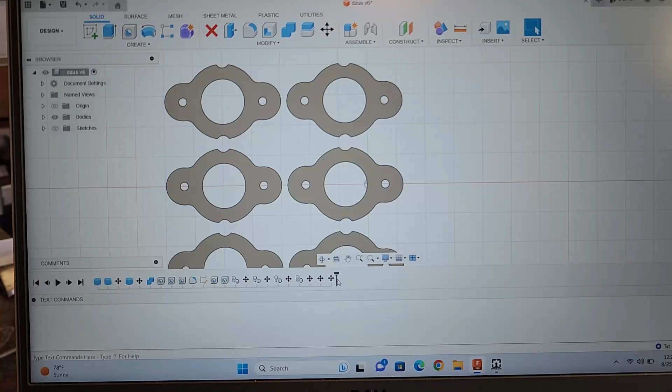Okay, quick overview on how I made this. So there's the end product. I'm going to go all the way to the beginning. Okay, so made a circle, made another circle, or I should say cylinder. Those are cylinders.

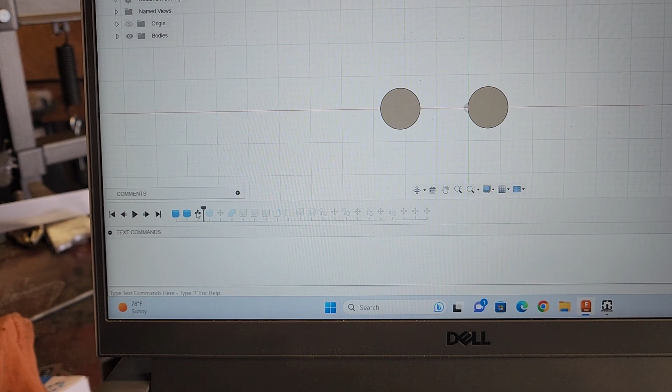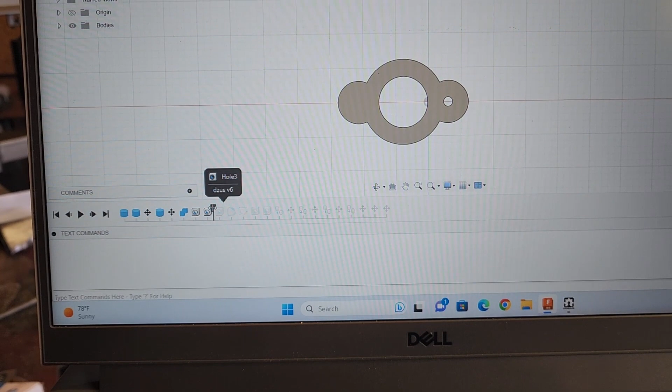Spaced them the appropriate space, made another one in the inside, positioned it correctly, combined them. Center hole 3/4 inch, outside hole it's a 140, gives me a little room for a 1/8 inch rivet. Same thing, that's just centered in this circle there,

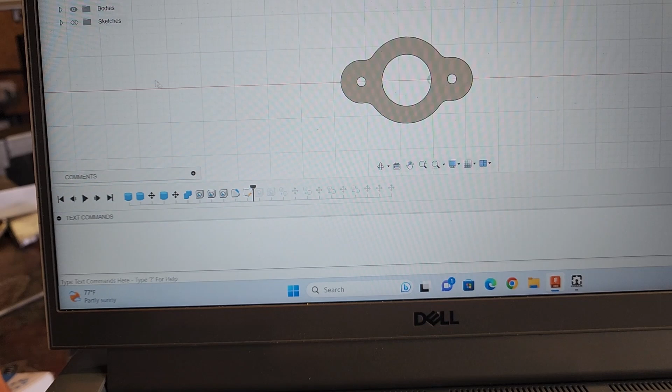radiused the edges there. Now this is where I created a sketch to locate the spots where I clearanced it out. Okay, turn the sketch off. Now next is creating that hole, which is on this plane, but you locate it off of the sketch. So you can see there's the sketch on and off.

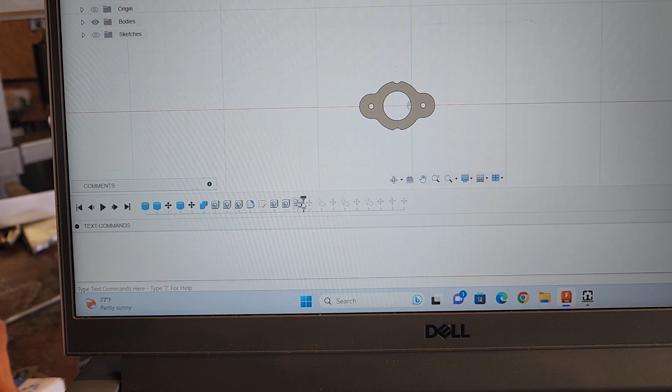Okay, what was this? It says copy and paste bodies. Oh, because I copied and then moved it, and then I did the same. This is how I duplicated it to get my 6 pieces, so it would cut 6 pieces. And then I spaced them out a little bit to get them away from each other so they would cut

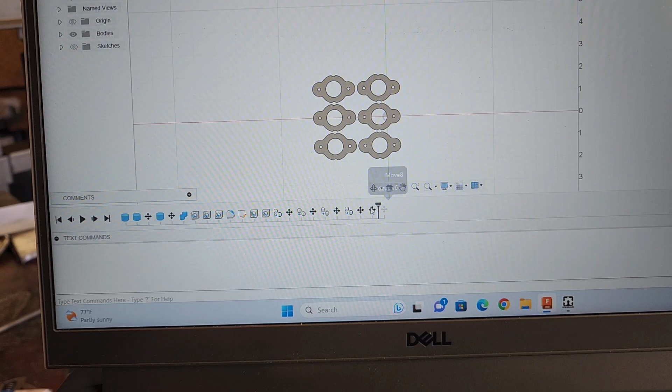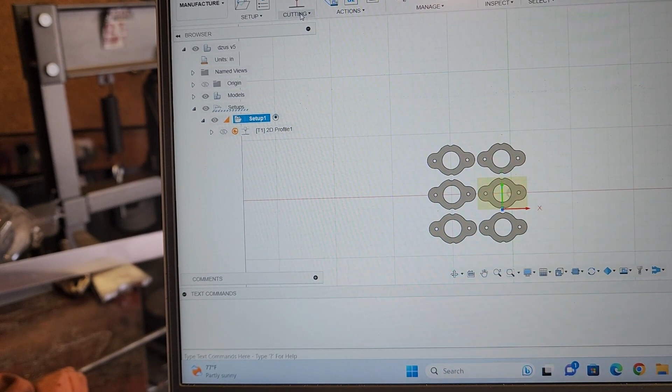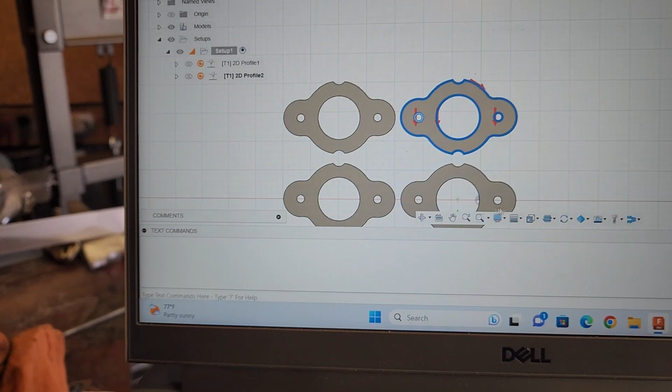a little better. So then you go over here to click that, go down to manufacture, and then how I do this with everything actually set up is you hit the cutting 2D profile, and you kind of go over here and select your plasma cutter, and then you just go through and select all of the contours that you want cut, each and every one of them. So you go through and you do all that stuff.

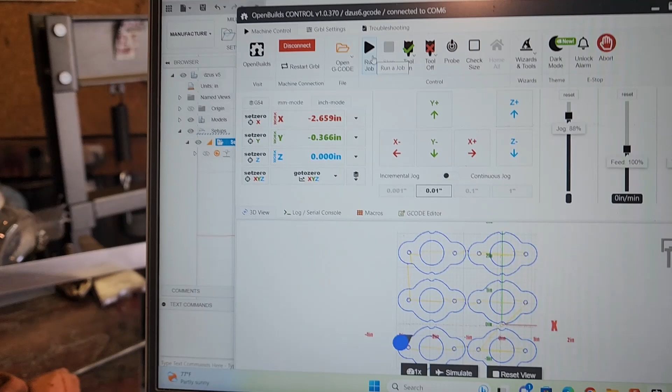You go up here, post-process, it creates an NC file. From there, you open the NC file up. So you open the G code and it pulls it right up there. And then once your machine's homed, which I'll show here in the next little tidbit, you hit run job, and that's it.

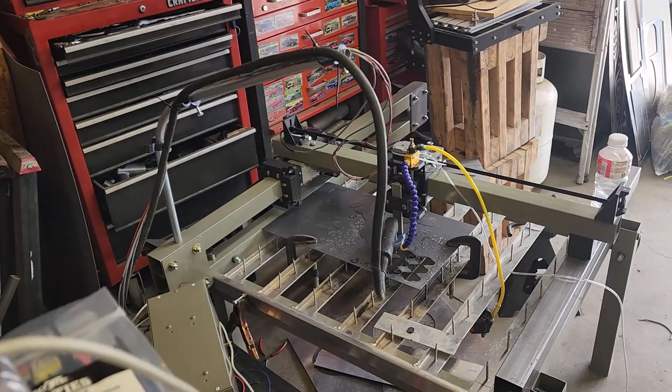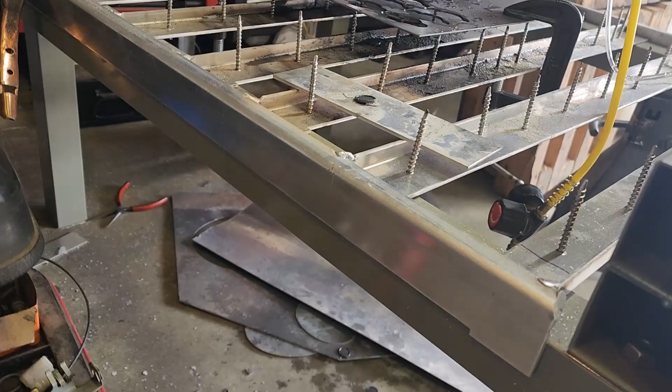Pretty easy how you can kind of set the position of your material. So what I'm doing is I'm going over, watching where it's at on my piece. So that's kind of the edge of my cut. You can clearly see I'm off a little ways. I'm off, I don't know, maybe 3/4 inch.

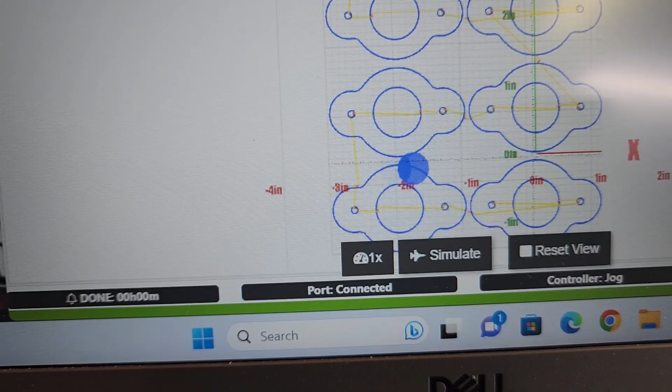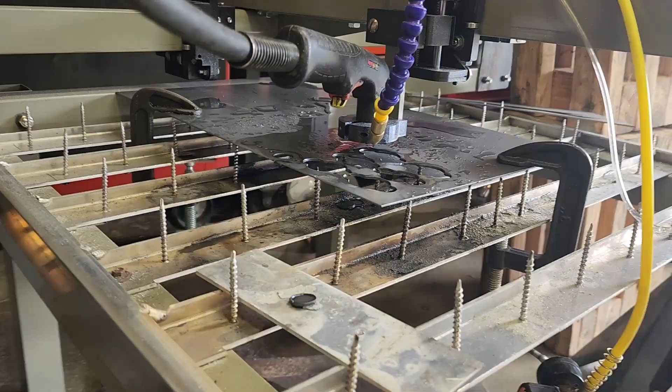So there may be an easier way of doing this, but what I'm going to do is go back up 3/4 inch the other direction and hit 0. Now when I move this back over to the edge of the cut, it should be, yeah, just barely. I got maybe 1/4 inch there, if you can see it.

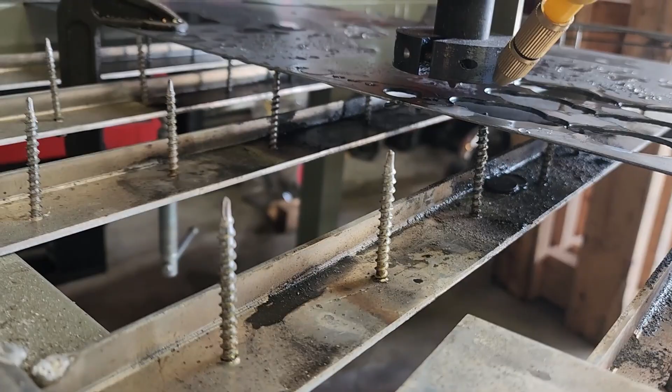There's about 1/4 inch. Anyway, so do that, and then run it in the Y direction, kind of out the edge of your cut path here. And yep, that looks like that will clear that bad cut right there.

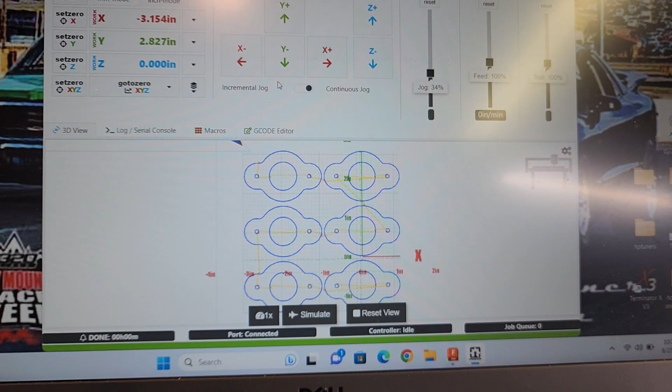So I'm just playing with my kerf width right now because my holes were not coming out correct. So that's why I already cut some of these out, and now I'm going to cut them again because my kerf input on the program wasn't correct, and that made my holes not the correct size. So we'll cut here in a minute.

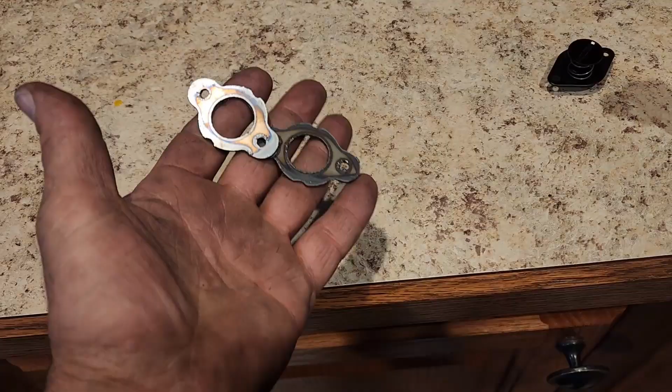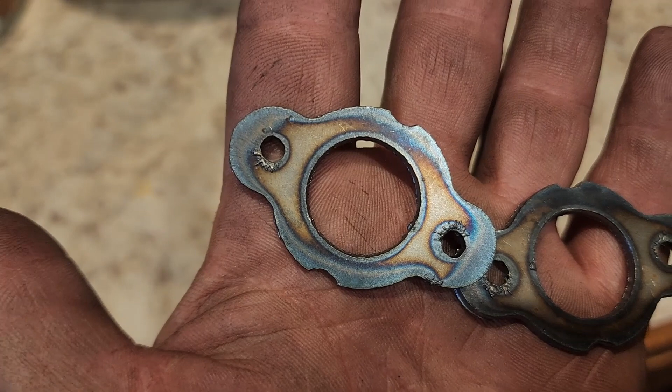Alright, here's what I came up with in the end. They didn't turn out bad. They got a little bit of slag on them. I knocked some of it off. They'll clean up pretty nice. Anyway, the holes are pretty decent. It's decent. So this is what I'm making.

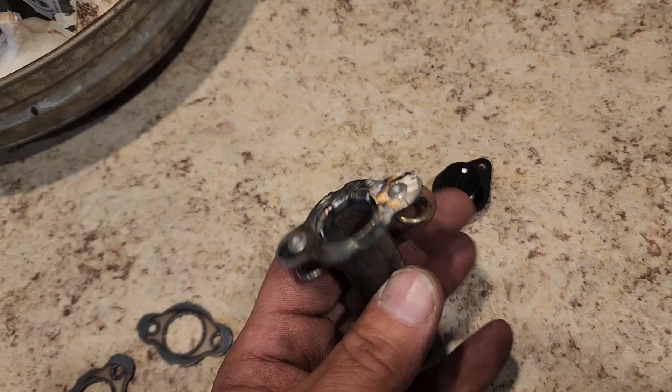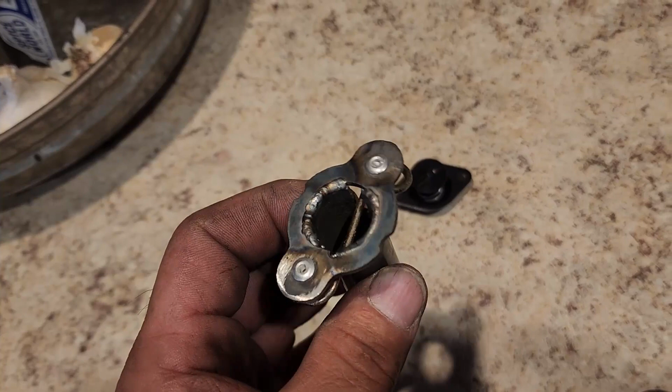It's basically a mount for a Dzus for my hood. Dzus fastener. So quarter turn Dzus dealy bobber. Anyway, I will be welding in a nut into the bottom of the tube. This was just kind of a tester piece, but yeah, it should be cool. A lot better than what I've got on there right now.